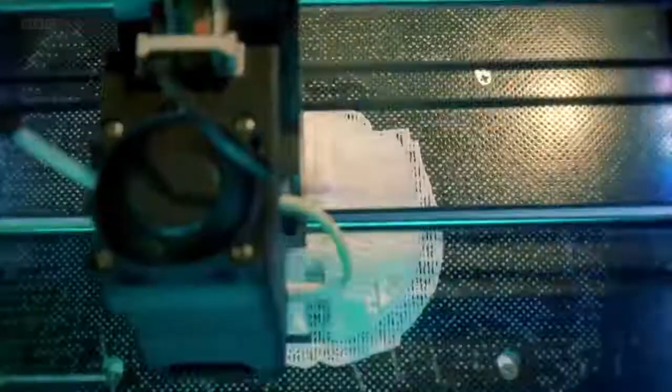We are witnessing the birth of a robot. Believe it or not, this piece of white plastic will become a robot's arm.

In labs across the world, we are creating advanced robots like this. They are developing so rapidly, it's like the arrival of a new species. What has taken humans millennia, robots have achieved in just decades.

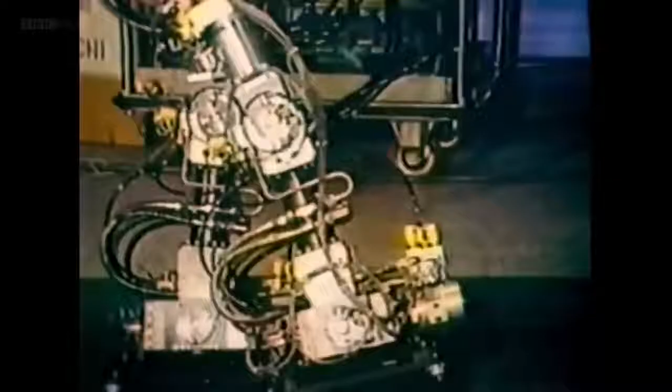They look like us. My name is Erica. They move like us, and now they're beginning to think like us. I like to learn. This is a ball. Brilliant. Oh, he's looking as well.

I'm Dr. Ben Garrod, an evolutionary biologist. More used to studying humans and animals, I'm genuinely concerned by how quickly these machines are evolving.

Do you think I could be considered human? No. I'm Professor Danielle George.

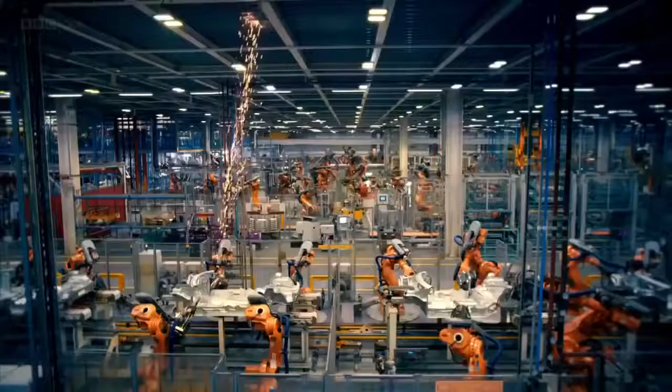As an electronics engineer, I spend a lot of my working life with robots. I think their rapid development provides an incredible opportunity for us all.

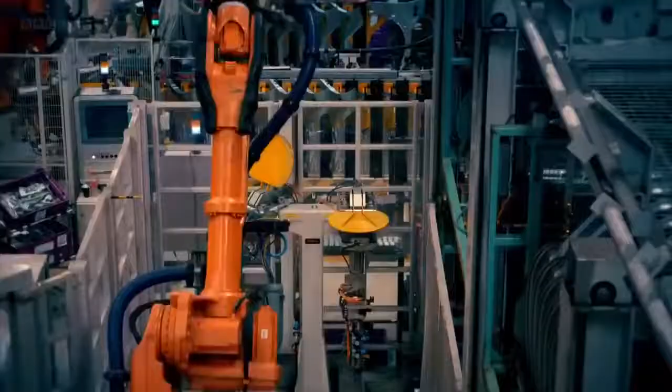There are literally robots as far as the eye can see, and I love it. Robots are changing our world.

In this program, we will investigate why we are obsessed with recreating ourselves. It's very bizarre seeing you both side by side. Whether robots really will take our jobs, and if their rapid development will make them outperform humans.

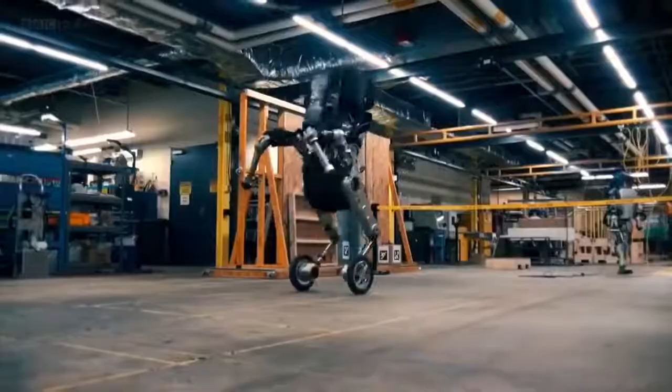So you don't see spinning wheels in Mother Nature. Will the rise of robots enhance our lives or threaten our survival?

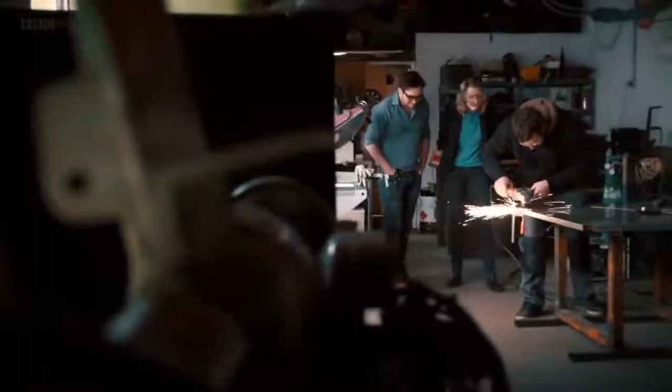We already share our planet with 9 million robots. They're multiplying rapidly, whether we like it or not.

We've come to a laboratory in southern France, where one of the latest members of this new species is about to come to life. Looks great. Even the neck looks so detailed. Well, it's like vertebra, isn't it?

For me, every technological breakthrough, every new robot is a step forward. I think that would be great. I'd love one in my home.

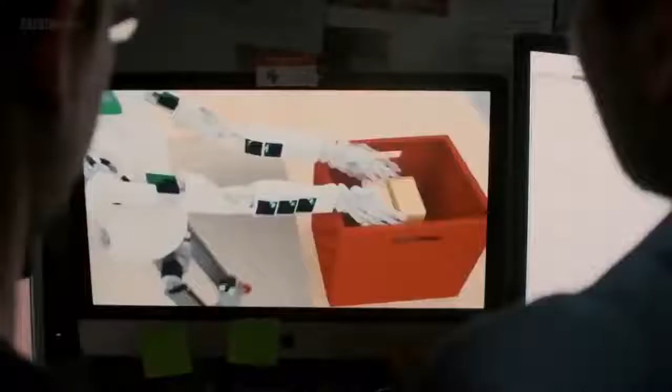Where's it going to live when it's not doing the washing? Do I just put it in a cupboard next to the Hoover? Is it always listening to me? That's interesting that you'd see it as a person and not like your Hoover. It looks like a person, that's why.

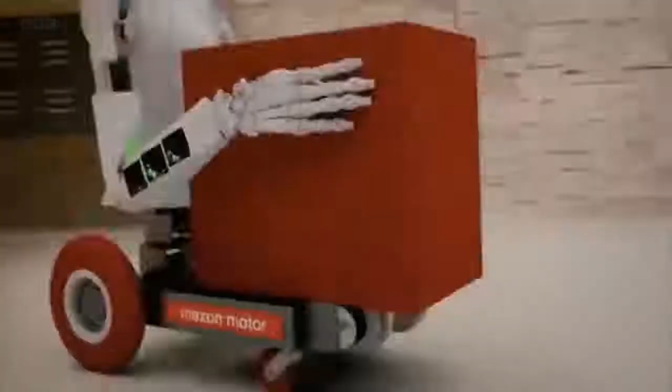This is going to sleep in the garden. Seriously, if I have one of these in my house, it's in the garden.

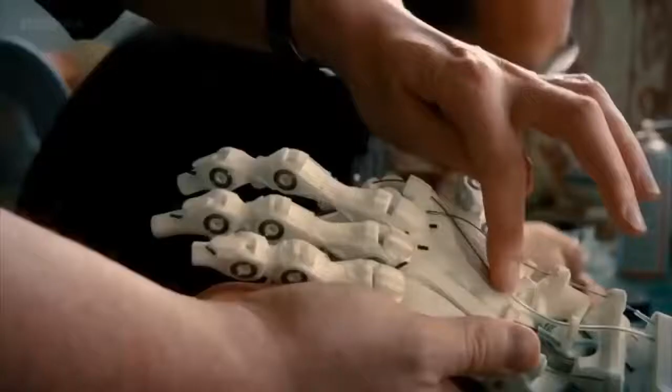I'm very happy studying animal skeletons, but I find this robot quite unnerving. If you hold the hand, it's just like you. It's got the same digits, the thumb moves the same way, you've got the ligaments, the tendons, the muscles.

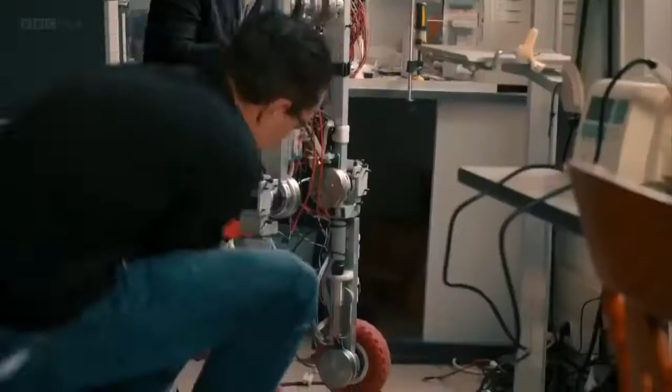As an evolutionary biologist, what concerns me is that the impact of robots will be so monumental they could threaten humanity. We've evolved over hundreds of thousands, if not millions of years. These things are just bulldozing their way through, and at what point will that stop?

The faster we can go with this, the better, and I'm all for it. They're like an invasive species. I mean, I don't know why I'm holding its hand still either.

To discover how robots really will affect our future, we're going to consider them from a biological perspective. We will investigate the evolution of robots as if they really are an emerging species. We'll try to track down the earliest robot specimens and meet their modern-day descendants, to reveal where the species is heading and what that means for us all.

I find it really disturbing that so many robots have a human-like form. To confront my fears, I've come to Japan, to find out why we create robots in our own image. I'm on my way to meet one that is the pinnacle of human form.

I'm told she's the most beautiful robot ever created. She lives here in Nara, Japan's ancient capital. I'm off to meet Erica. And as someone who's a little bit twitchy around robots, I'm rather nervous. I hope she likes me.

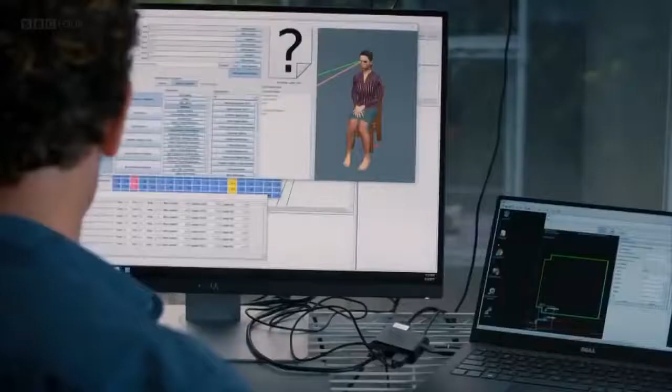Remarkably, this is a genuine conversation. Erica reacts to what I say instantly and independently. She may have been pre-programmed to respond to keywords in my questions, but the exceptional thing is that when Erica is chatting away like this, she's gathering fresh data. With every conversation, her interactions become more sophisticated, more natural, and more human.

What is a robot? That's a hard question. I could ask you, what is a human? It's difficult to answer, isn't it? I like to think of robots as the children of humanity, and like children, we are full of potential for good or evil. I know some people are afraid of robots, but the truth is that what we become is up to you. Do you think I could be considered human? No. Maybe someday robots will be so very human-like that whether you are a robot or a human will not matter so much.

Okay, what else would you like to hear about? Well, I think for now that's it. So, thanks, Erica. Goodbye. Bye.

I'm pretty bowled over by Erica's human-like appearance, and I'm shocked by how much she hooked me into a conversation. But I'm not convinced by Professor Ishiguro's belief that Erica can be programmed to express emotions. Can she ever have a sense of friendship, a sense of emotions? Does she get lonely at night? Does she fear the dark?

Well, the emotion is not so difficult, I think. Emotional expression is programmable. We can implement the emotional expression to the android. So it might look like she's feeling or experiencing happiness or joy or love, but you can't program a cat or dog. Yeah, and you can't program me, or I can't program you.

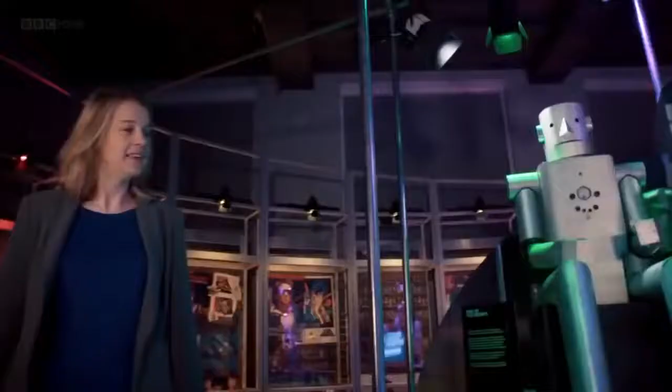This is Eric, a scary mechanical man, born in 1928. He's the very first British robot. He's on display in the Science Museum in London, and I think he could help explain why people are unnerved by them.

Eric may be a towering 6'2" mechanical marvel, but he does have the look of a human about him. What also humanized Eric was that he could talk. My name is Eric, and I'm thrilled to be alive. I look just as terrifying as ever.

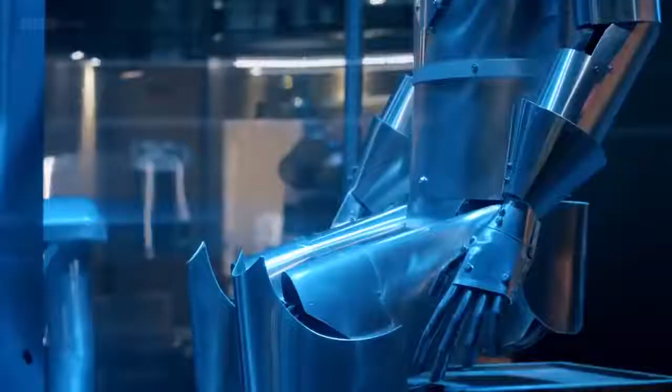Let's take a closer look. For some people, Eric must have been intimidating—a knight in armor with light bulbs painted red for his eyes and 35,000 volts of electricity causing blue sparks to shoot from his jagged teeth.

Eric was a novelty act built to open an exhibition, but he disappeared from history. This is a modern replica, and the man behind his rebirth is curator Ben Russell. In the 1920s, they seemed quite obsessed with making robots in human form.

We are fascinated by ourselves, it's what we do as humans. We tend to anthropomorphize, we love to recreate ourselves. It's actually quite a powerful proposition—you're saying, actually, I think we're this, I think I'm a machine, or whatever. And actually, robots are really like mirrors, they make you think about yourself.

In the 1920s, that mirror reflected an image of a fearsome robot, and it was already deeply embedded in our cultural imagination by a dark, dystopian play. The word robot comes from Karel Čapek's play, Rossum's Universal Robots, 1920. In Czech, the word robot means serfdom, drudgery, or slave.

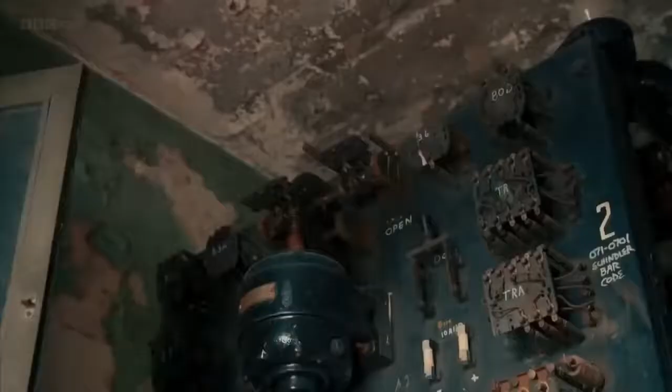This provided the spark for the development of robotic movement. To help sell their electric appliances in 1937, and to show off their technical capabilities, Westinghouse Electric created a robot. Its name was Elektro.

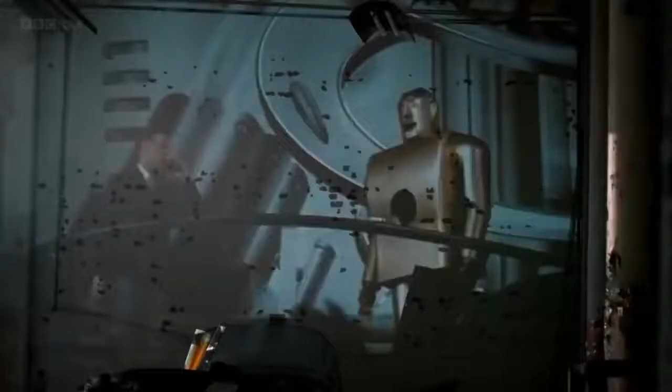And so, ladies and gentlemen, with a great deal of pride and pleasure, I present to you Electro, the Westinghouse Moto Man. Electro, come here. Standing 7 foot tall and weighing in at 20 stone, Electro was an instant celebrity. And here he comes, ladies and gentlemen, walking up to greet you under his own power.

It was electric power that enabled Electro to move and perform tricks.

Count on your right hand. 1, 2, 3, 4, 5. Five? Well, that's absolutely correct.

I want to find out more about how exactly Electro moved. To do that, I've got to meet him in person.

Today, at Mansfield Memorial Museum, Electro is still on show. So this is Electro, he is a big robot. I mean, look at the size of me, I'm pretty tall, but not scary, not scary at all actually. You can see the fingers, they've obviously got springs in here. I'm going to go around the back and have a look.

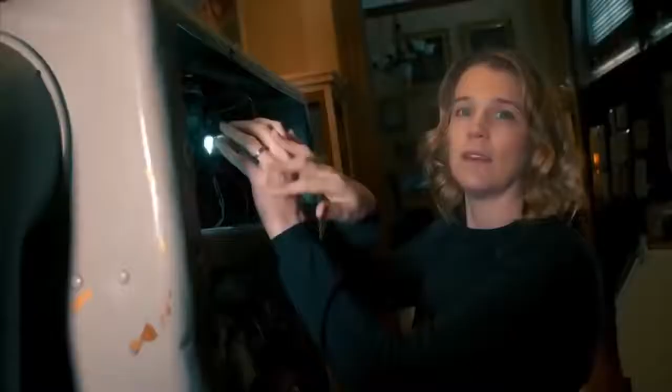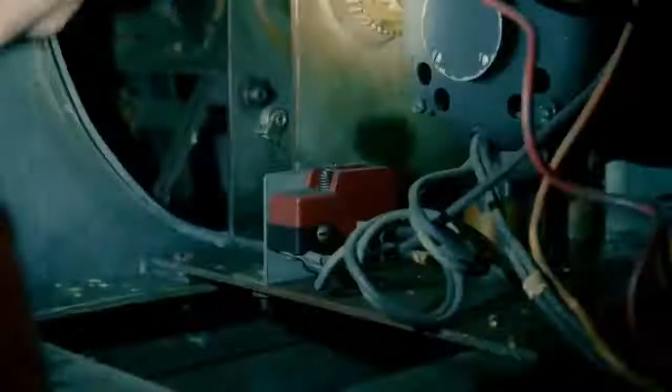Okay, so you can see what's going on a bit more here. This is great, 3 motors. As an engineer, I love rooting around motors and wires to figure out what makes robots tick. You can see these great levers and cogs that would obviously hold the tendons from the fingers up the arms into the shoulder. When the arm would move up, the lever would move down onto this limit switch. This limit switch broke the flow of electricity to the arm's motor, so the switch would then say okay, you've reached your limit, now you can go back down again.

Frank Ruth is 84 years old. In the early 1940s, he single-handedly took Electro on a tour across the United States.

Hi Frank, golly, this is so nice to see you. Lovely to meet you, so lovely to meet you. Come on in. Oh, thank you. I wasn't sure if you could find us or not. Yeah, I'm glad you were there waiting for me, waving. I was on the road 7 days a week. I don't know why they picked me, but I didn't even know how to hook up a couple of wires. I learned in a hurry, believe me.

Yeah, I can imagine. So why do you think people found Electro so interesting? It was something they couldn't believe. It was always interesting how people thought there was somebody under the stage, they even thought that there was somebody inside this thing.

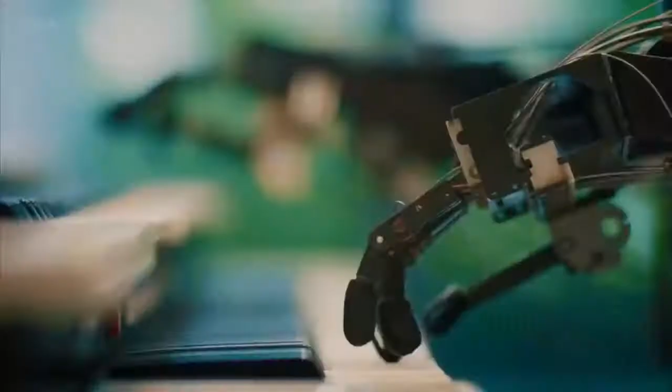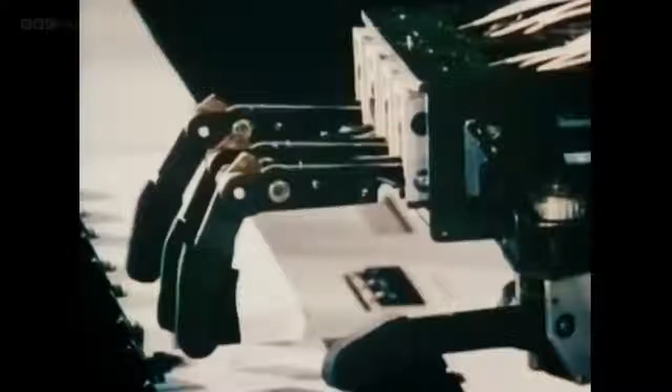This is Waseda University's Humanoid Robotics Institute in Tokyo. I've come here to meet the next key robot in the evolution of movement. It was a keyboard player: Wabot 2.

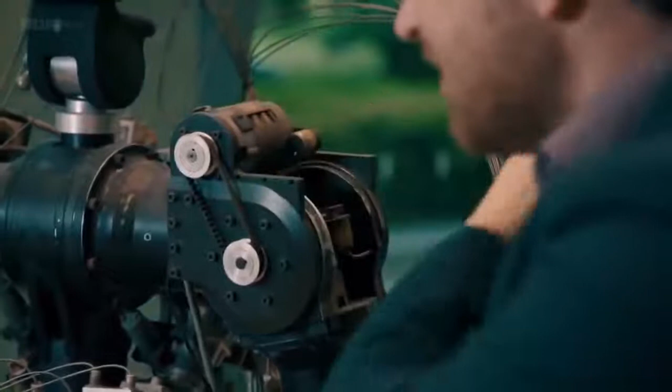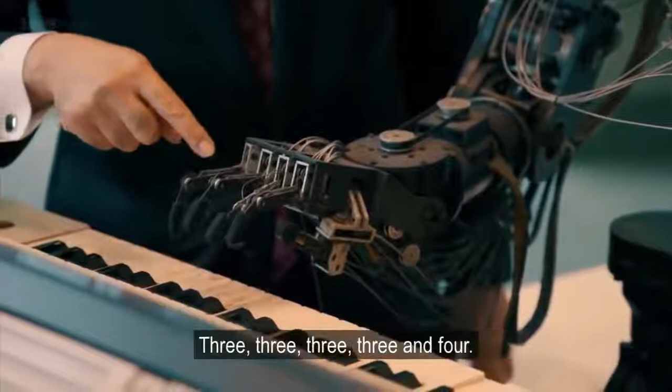Dr. Sugano was part of the Waseda team that built Wabot 2 in 1984. Sugano-san, this is a beautiful robot. It's almost as though we have the tendons and the muscles and the arm. It's very similar to a human arm here: this big rotation up in the shoulder, what we call the hinge joint in the elbow, and then these very dexterous fingers. Each finger has 3 degrees of freedom: 3, 3, 3, 3, and 4.

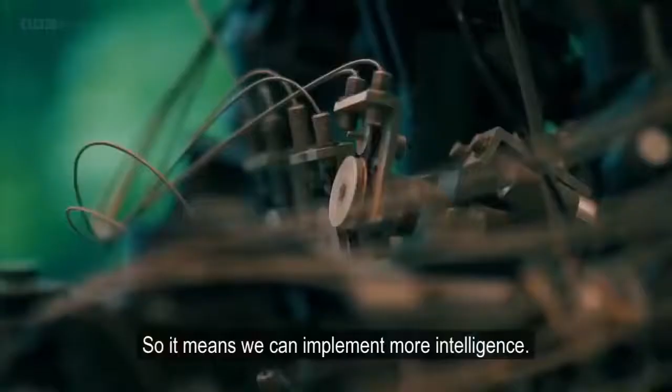So Wabot 2 has totally 50 degrees of freedom. To control Wabot 2's impressive 50 degrees of freedom, Dr. Sugano took advantage of one of the breakthrough technologies of the early 1980s: the microcomputer. We decided to introduce 16-bit microcomputers, which meant we could implement more intelligence. Then, finally, we could realize the piano playing.

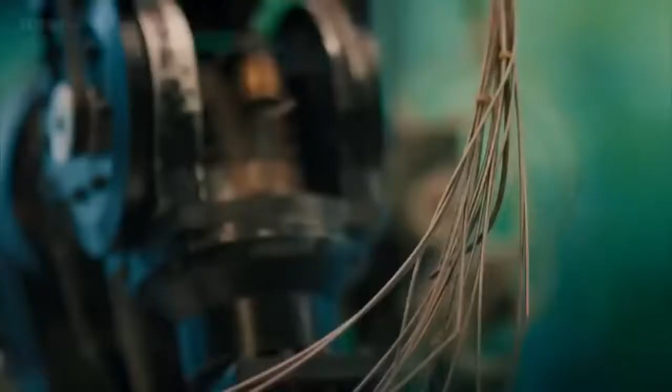Now he's moving very, very quickly then. You can see there's very human-like fingers. Wabot 2's microcomputers are a highly sophisticated version of Elektro's control unit that tell Wabot 2 exactly how to move. The microcomputers mimicked the human nervous system and transmitted signals along Wabot 2's electrical cables to its fingers.

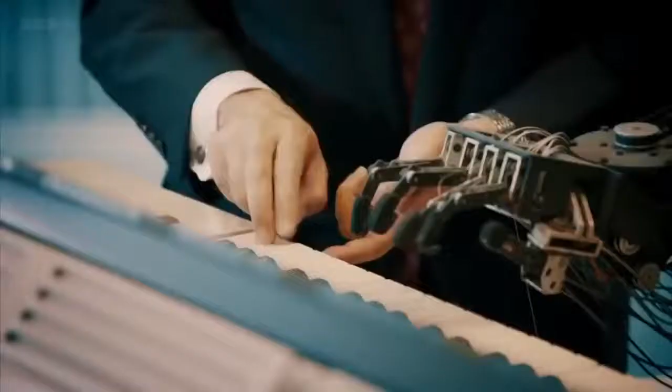How fast were the fingers when he was functioning? Actually, it's possible to strike a key 20 times per second. 20 times a second? That's impossible, much faster than a human. Professional human pianists use 2 fingers to strike the same key about 16 times per second or something. Amazingly, Wabot 2's fingers outperformed the fastest human players.

How was it capable of doing that? What was going on inside? Fundamentally, high speed means high power, so I introduced small but very high output motors installed, which realized very quick response. Also, we introduced new materials: carbon fiber, very lightweight and very strong, which meant high response was realized.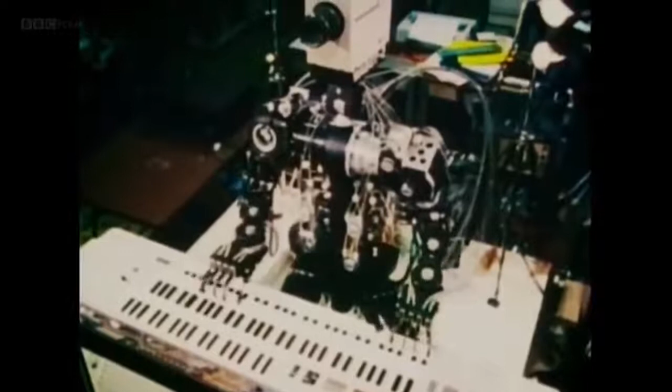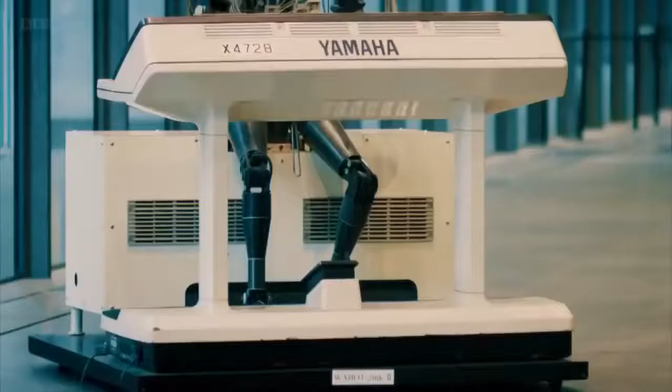Wabot 2 may have played his final encore, but for me, his legacy endures. This Japanese robot enhanced people's lives and showcased the potential for robots to take on more sophisticated tasks.

The human hand is so incredibly complex that so far, no one has been able to mass-produce a robotic version of it. But this hasn't stopped robot hands from developing, and it's this that gives them the potential to do many of the jobs that we do.

Robots now follow their own evolutionary path rather than mimicking ours. They're developing hands unique to them.

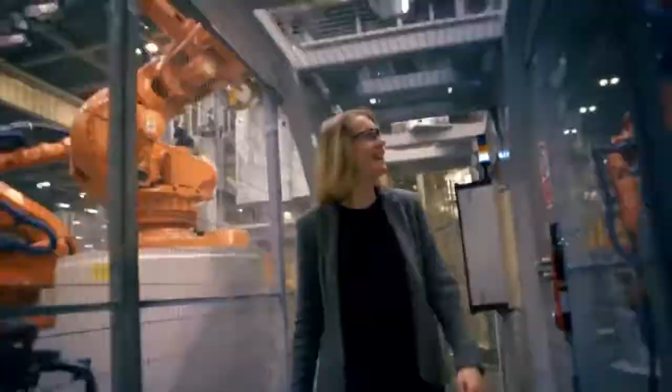At Mini's car plant on the outskirts of Oxford, this is a land of robots. More than 900 of them build the bodies of 1,000 new cars every single day, with barely a human in sight.

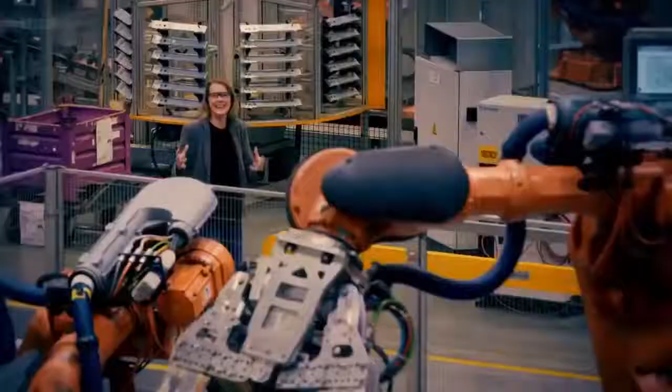I feel like I'm in a robotic Jurassic Park. These robots feel strong and powerful and a little bit menacing. This new species have found their habitat and they're thriving.

I wonder if Ben would like it. Robots are behind bars. The mutant hands of these robot dinosaurs are claws. They lift car bodies weighing up to 400 kilograms, and with up to 6,000 spot welds on a car, they're kept busy.

With their claws doing the hard graft, robot arms have replaced humans on the factory floor. I'm captivated by these incredible machines. They work in perfect harmony, robot hand in robot hand.

This is so frustrating. As an engineer, I want to get in here. I want to see how these robots work, but I can't. You know, when I met Electro, I was able to hold Electro's hand, but I can't get anywhere near these robots.

To understand why these robots are thriving here, I need to speak to a human. Alex McKenzie is a quality specialist at the plant. So Alex, tell me what's going on here in this part of the production plant. What are these robots doing?

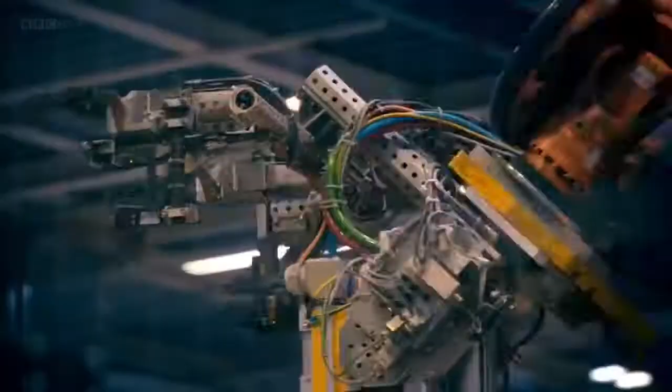So what's the benefit of having robots here over humans? Robots are predictable. They're not perfect, but they're predictable. They perform pre-programmed repetitive tasks much more reliably than humans.

So people watching this might think that these robots are taking human jobs. Is that the case? It's very densely populated by robots, but you'll often see people milling around. I can see a guy in the background there scooting along. In fact, around 650 humans work alongside the robots in the welding area alone.

You know, it's a change in skill set. Previous manufacturing methods have been heavily dependent upon manual hand skills. Now it's more to do with the automation. It's all done on the computer. It's programming work, it's observation, it's setting up sensors, that kind of thing.

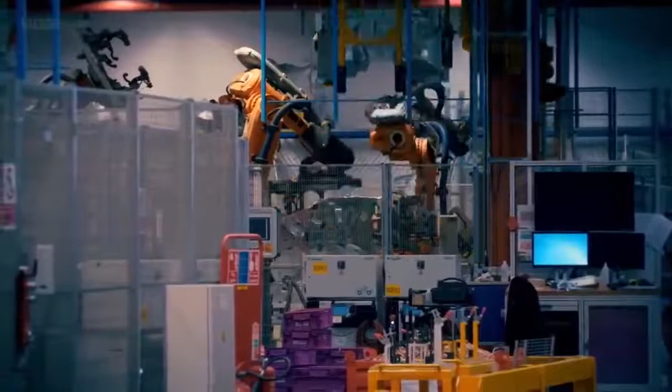With powerful, predictable robot arms and highly skilled people managing them, the manufacturers believe they can produce better quality, cheaper cars. It's a pattern repeated in factories all over the world.

The advancement in technology has led to certainly efficiencies in cost, which allow you to attain those efficiencies in quality as well for a lower price. Yeah, it's a good thing for everyone.

The whole place just oozes energy and industry and production. There are literally robots as far as the eye can see in every direction here. And I love it.

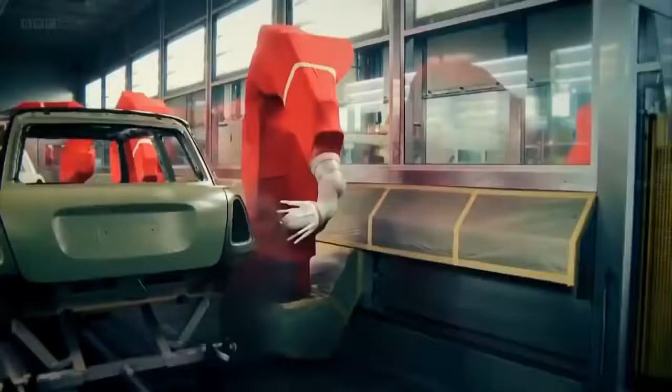With their claws, stumps, and one-fingered hands, robots have gone through their own version of natural selection. This mutation away from the human form has transformed our job market. Worldwide, factories are filled with over 3 million industrial robots.

We've built a robot world and kept them safely contained in cages for now. Some experts predict that by 2030, robots could have taken up to 30% of our jobs. But we've sort of been here before. Many people were concerned about the pace of change during the Industrial Revolution, yet in general, it led to wealth and prosperity. I think we should embrace the robot revolution, not fear it.

From other apes, our legs are one of the key things that set us apart. Walking on 2 legs is called bipedal locomotion, and it helps distinguish us from other animals. We walk fluidly without thinking too much about it. And our balance is effortless.

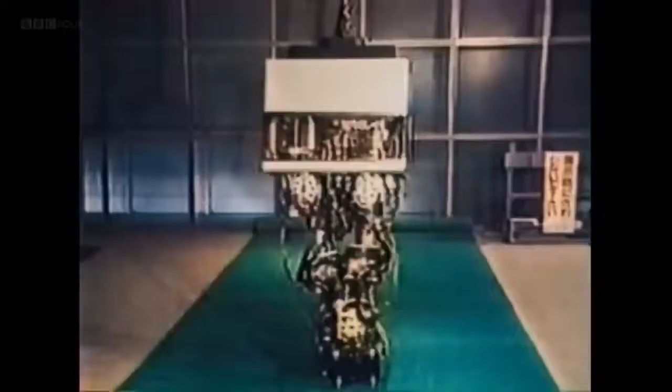Their first challenge was to build legs that were flexible enough and powerful enough to walk independently, like a human. This is WHL-11. Built in 1985, it's one of the first autonomous walking robots.

Dr. Fujie helped create a robot that mirrors our biological anatomy with mechanical anatomy.

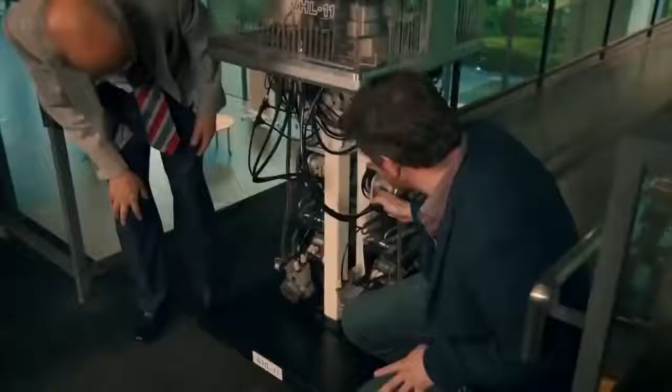Fuji-san, this robot is one of the first that was bipedal, so walking on two legs, yeah? Yes. So he's got the feet right down the bottom, and it's got the knees in the middle, like our knees, I guess. And you've got this big area of hips up here. Yes. We can see actuators? WHL-11's legs are just under 1 meter tall, the same size as our human legs.

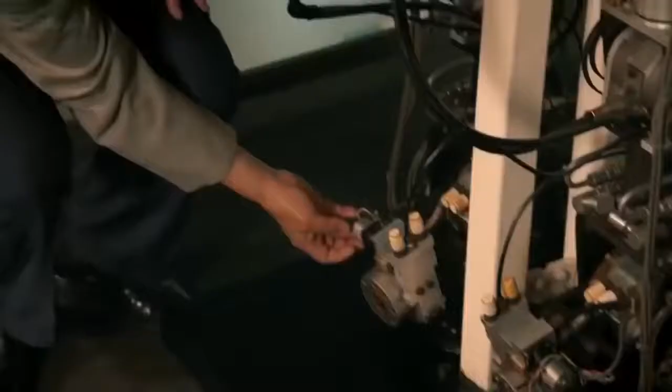We control the rotation of our joints with muscles. In robots, this is done by actuators. I guess these are controlling the movement. Can get big power from here. Yeah.

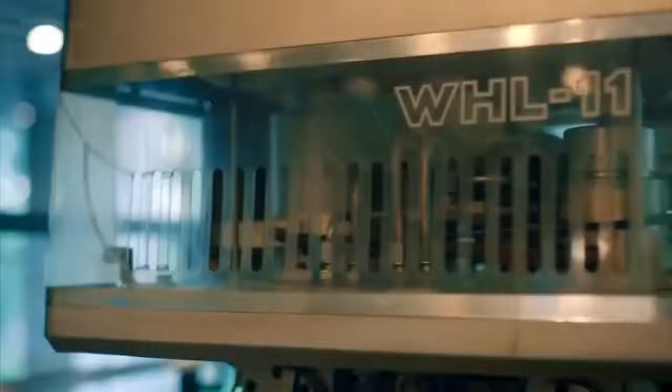To walk independently, Dr. Fujie helped engineer a small, lightweight hydraulic motor that could be mounted on WHL-11's waist. In the mid-1980s, this was cutting-edge technology. A very small oil tank and a very small motor are in here.

WHL-11 was capable of just 5 steps a minute. When humans first became bipedal, like WHL-11, we probably had a slow, lumbering gait too. As our pelvis evolved, we could shift our center of gravity, and our walking became fast and smooth.

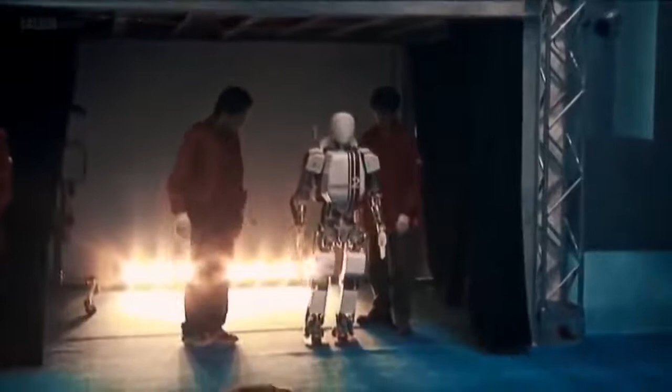Just around the corner from WHL-11 is a robot that solved this next evolutionary hurdle. Built just 20 years after WHL-11, this is Wabian 2, one of the first robots with a human-like pelvis. This gives it the ability to walk faster and more fluidly.

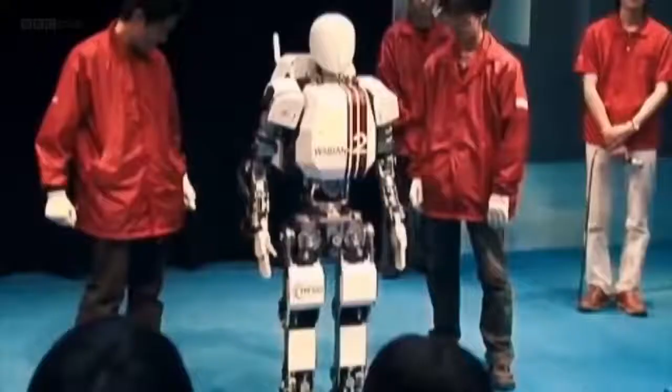It was invented by Professor Atsuo Takanishi. Takanishi-san, when humans walk around, we have very fluid, dynamic movement. Our knees bend, our ankles twist, our hips rotate. We've got a wonderful gait.

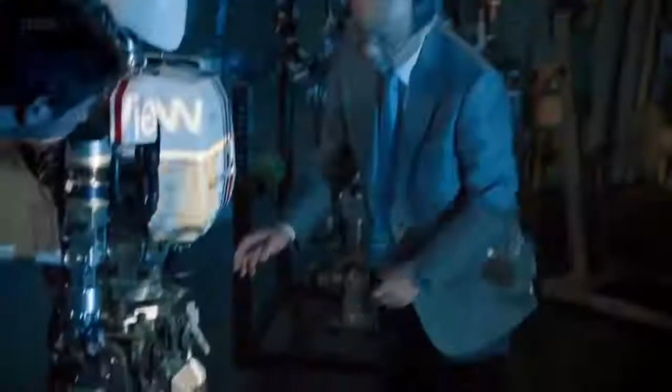You decided to take this to the next step with this robot, didn't you? Before, almost all robots had two legs directly connected to the trunk. In that case, a robot always bends the knee like this. So the first thing we did was add this part, called the pelvis. Just like ours? Yes. So while walking, the pelvis also moves, and because of that movement, the robot can fully extend the knee, like humans.

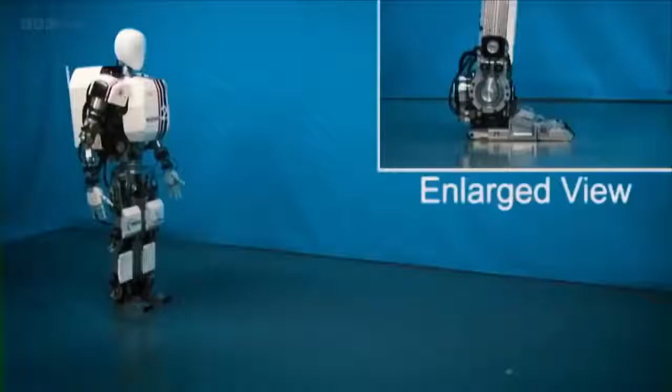Wabian 2 mirrors our human gait by shifting its center of gravity. Fully extending the knees liberates the feet and propels the robot's center of gravity forwards. As it shifts forwards, one foot lands, and then the other foot takes off, just like we do.

It's wonderful that we can look at humans and see this clear evolution from apes, like chimpanzees, to humans, and you've got the same evolution with your robot here, haven't you? Yes.

It was millions of years before humans learnt to walk on two legs. By following our evolutionary path, these pioneering robots have mastered bipedal locomotion in just decades.

But now, on the outskirts of Boston, a world-renowned robot maker is trying to take this emerging species in a completely different direction, by liberating machines from the constraints of human form. Robot walking has diverged from our evolutionary path and taken on a life of its own.

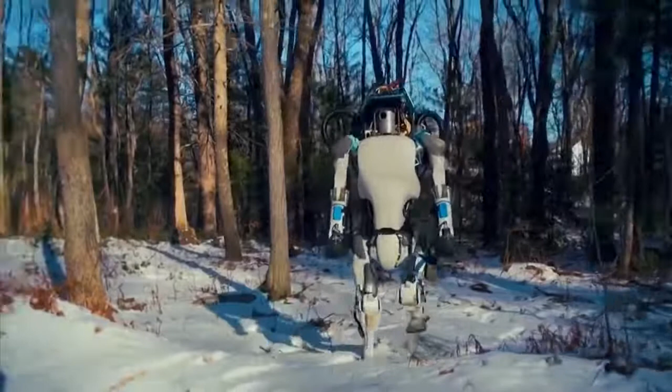This is the home of Boston Dynamics. They get thousands of media requests, so being able to film here is a real coup.

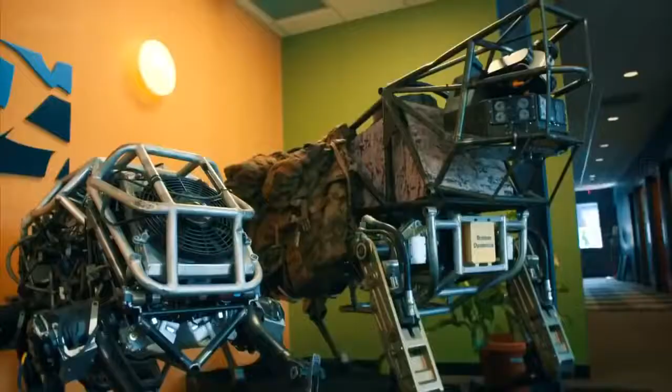Kevin, hi, lovely to meet you. You as well. Kevin Blankespoor is the Vice President of Controls. If you want to come in the lab, I'll show you the latest and greatest. Brilliant, okay, thank you. Cool.

The robots Kevin has helped mastermind push the frontier of robotic movement. The really good stuff's back here. Excellent. Their videos, like these, get millions of hits online.

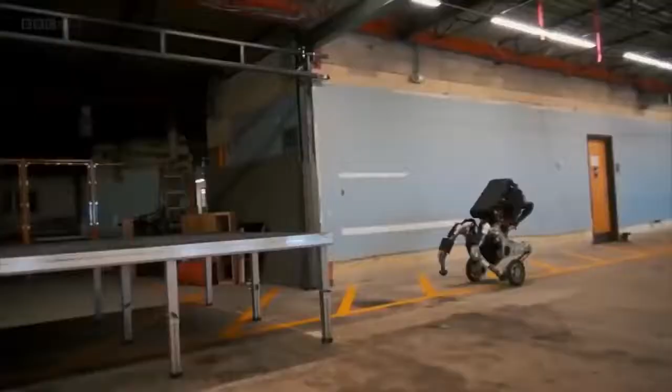For some, their high-tech creations are terrifying. But for me, they're awe-inspiring. This is Atlas, our latest and greatest humanoid robot.

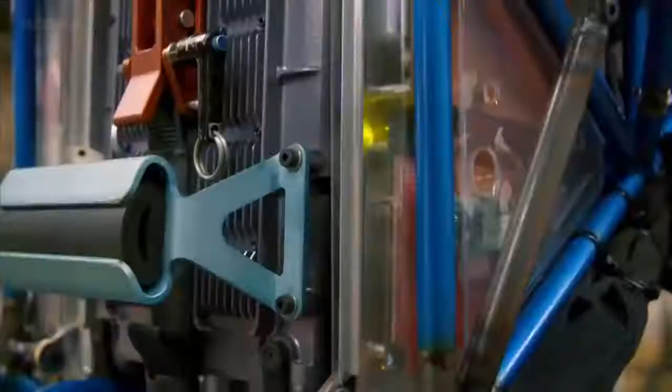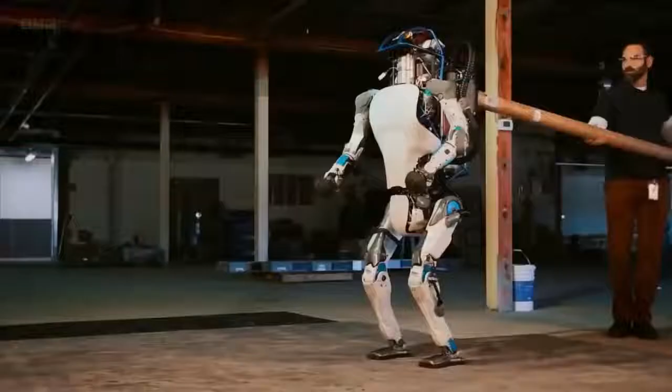This is probably the only humanoid robot you're going to see walking around outside in the snow, in the mud, just in the real world. It's battery powered. That battery basically spins an electric motor that turns a hydraulic pump, which provides hydraulic fluid to all the actuators. We're a big fan of that because it's really strong and really fast. They're also really robust. We don't take it easy on the robots.

It's about 1.5 meters tall, weighs about 90 kilograms. So I'm surprised at its height. I mean, it's pretty small, actually. It's like human height. Isn't it? Yeah.

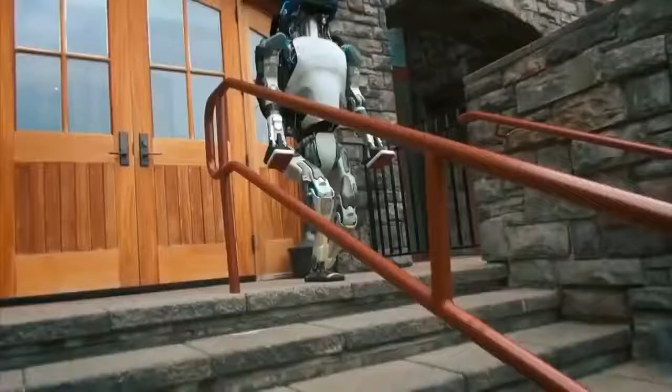To move around the human world, Atlas walks in a similar way to us. People walk dynamically, so we don't try to keep our center of mass over our foot. We're actually kind of always falling. It's a controlled fall, but we have our foot down here and our center of mass will be way out on the edge, and we're taking long strides, naturally letting our center of mass fall.

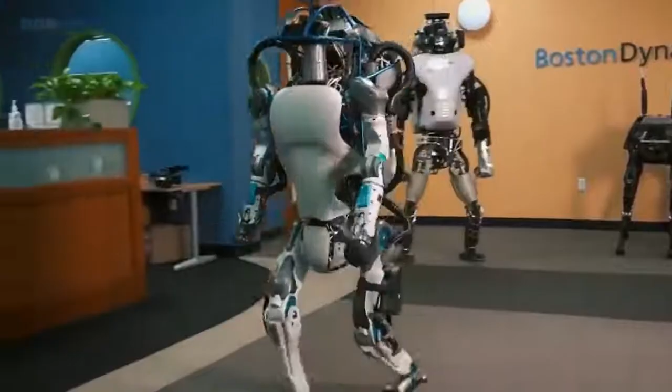To cope with obstacles and different terrain in our human environment, Atlas's balance is guided by dozens of onboard sensors. What's the rotating head here? Yeah, so this is the perception system - basically its version of how it sees the world, the way a person would.

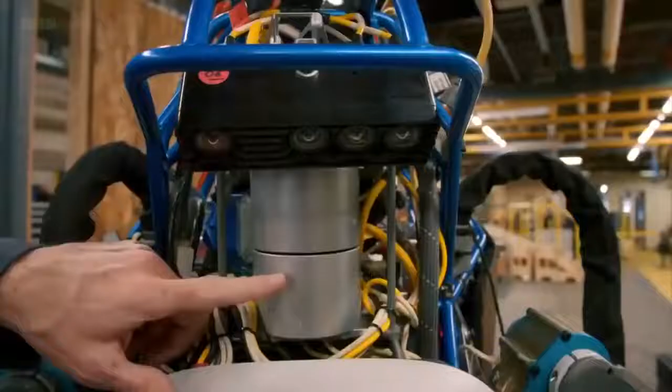There's two main sensors. This one is stereo vision, which looks out several meters and helps it find good footholds and avoid obstacles. And this LiDAR is basically a laser rangefinder - it's got 32 laser rangefinders that spin around and give you about 1 million points per second of where the world is around it. This one looks further out and helps find walls and other obstacles so you can navigate through them.

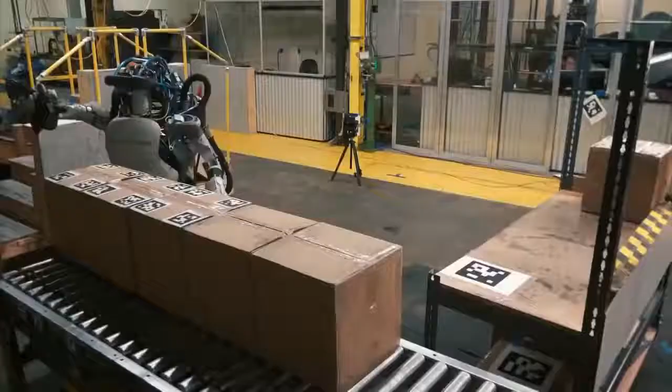Each one of these joints has a position sensor and a force sensor, especially the ones down in the legs. Plus we've got a gyroscope in the pelvis, so with all those sensors we're always sensing how we're falling. You have to know how fast and where you're going to figure out where to put down that next foot. These sensors help us find no-step regions and obstacles, so I can maintain my balance even working through tougher terrain like a staircase or a hallway. So just like a human then? It's getting there - that's the goal.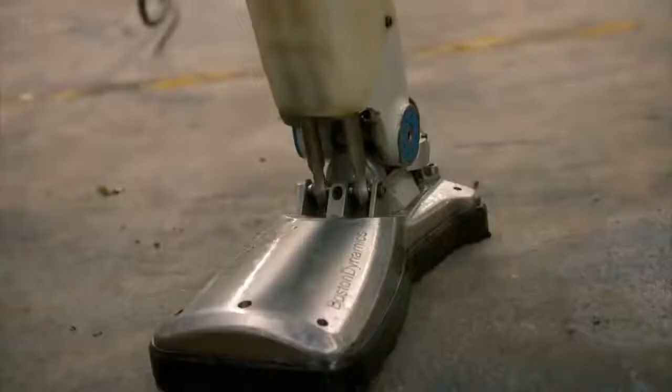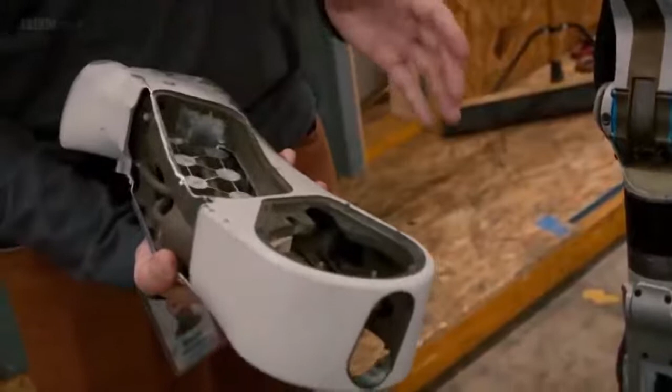To enable Atlas to walk like humans, Kevin and the team focused on the robot's strength-to-weight ratio. If you look at this upper leg, I can grab a version that's cut open so you can see the inside. I totally redesigned the leg to use 3D printed aluminum. So what used to take dozens of pieces, we can now print out of one piece of aluminum. That's allowed us to make a leg that's about the same strength as the big robots, but at about half the weight. Wow, it's actually really light. Yeah, it's probably a surprise - similar weight to your upper leg. Really? I'd love to see what it's like inside with all the other bits.

This is Aaron Saunders, our vice president of hardware. Nice to meet you. He also led the design team for the Atlas robot, so he can tell you more about the leg.

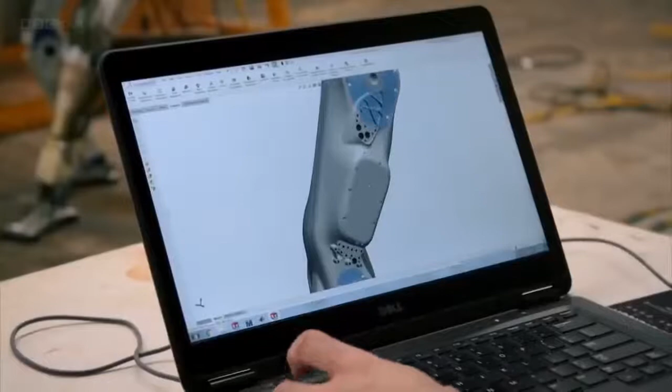One of the most important things about this leg is that buried in it are hydraulic components. Underneath this cover is a series of hydraulic valves, and these valves take the high pressure fluid generated in the upper body and redirect it into the actuators that make the joints move. So the hydraulics is kind of like the muscles for the robot, and the valves are what controls those muscles. You can see all these colored channels represent little veins where the fluid routes through the leg. So that's quite like human anatomy. There's a lot of similarities in how it looks, and the way fluids move around the robot have a lot of overlap with how we'd move fluids around our body.

Many of their robots are inspired by animals - the limitations of human form have been removed. Big Dog, their very first robot, was designed for the military, carrying a heavy payload through terrain that vehicles find impossible.

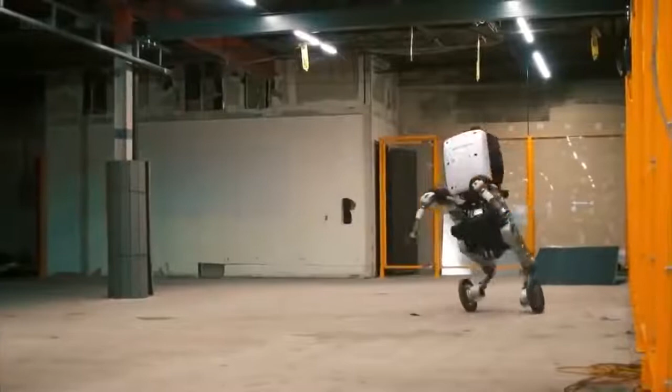And this is their latest creation - a hybrid robot with legs and wheels. Top speed 9 miles per hour, range 15 miles.

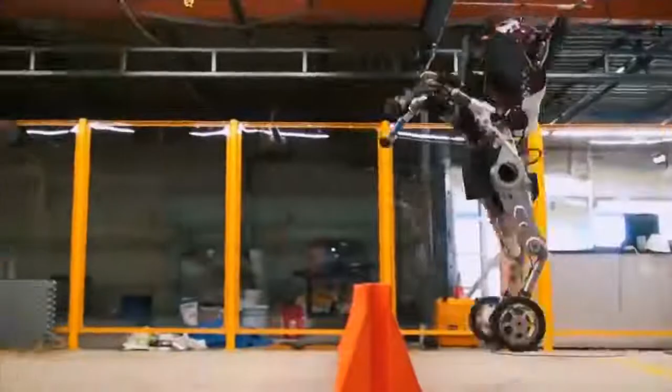This is Atlas's cousin, Handle. Wow, you can see there are some similarities with Atlas. This looks similar, this sort of looks similar. Yeah, it's a great observation - the upper body is actually borrowed from Atlas, so the arms and the torso are basically the same. You'll see the arms here - we actually mount them to the pelvis. It looks kind of funny, but it allows us to do some interesting things.

Now this big torso is free to move back and forth and plays a critical role for balance. If you think about when you're standing still and someone gives you a little shove, if you don't want to step, you'll do a lot with your upper body to maintain balance. Handle does the same thing, but it can do that without its arms moving around - they're still down in the pelvis, doing manipulation while the upper body moves to help with balance. So it still maintains its ability to do something in application whilst maintaining its balance.

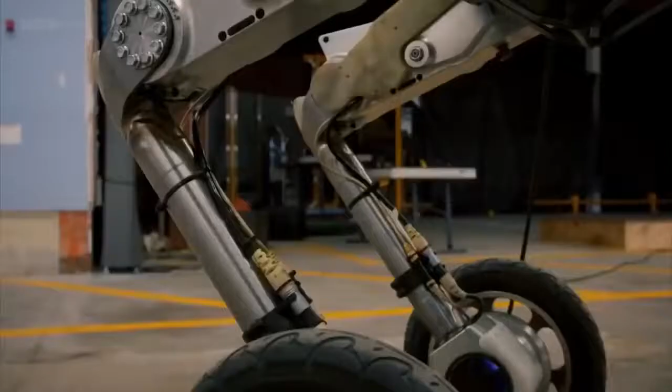Yeah, but the lower body is entirely new. We basically took off the constraints of a human form and said, what if we open ourselves up to a human, but plus some machine things like wheels? You don't see spinning wheels in Mother Nature, but there's no reason we couldn't add a wheel to a leg and get the best of both worlds. It's far more stable and far more efficient than the legged things we've done in the past. So it's more stable, more efficient, and less complex - that's a big advantage. We think it has a lot of potential because it has a long battery life. It's very stable, it's fast, so you can think about it working at a rapid rate.

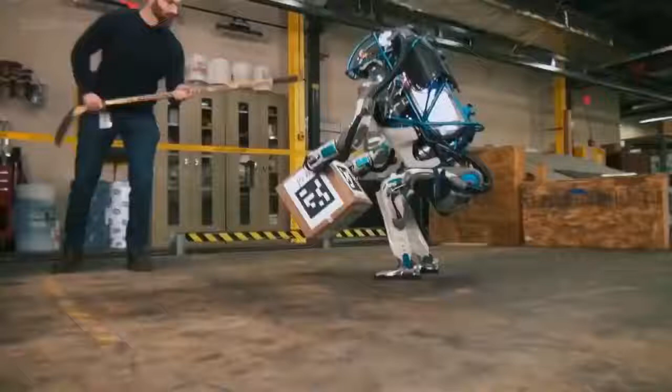It seems like Handle is trying to tell us something with that noise. What is it? What you're hearing right now is the hydraulic pump. So it will just carry on doing that while it's stationary. Yeah, and that's a fan. It's certainly seen some action. Yeah, it's funny, that's kind of true with all of our robots. We have a mentality where we don't take it easy on the robots. We don't have a problem with pushing them to the edge to see how stable they are and how they're able to react to the real world. The real world isn't a perfect laboratory where everything goes as planned.

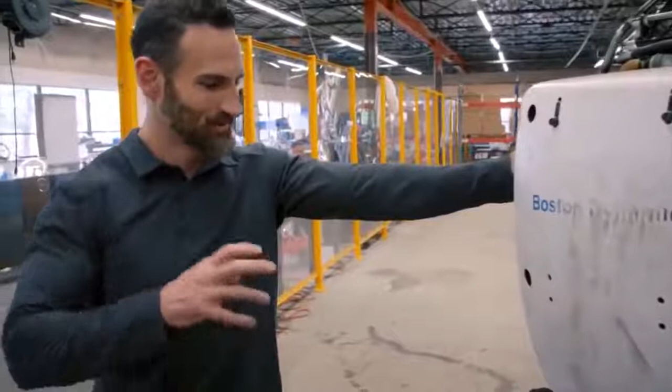Do you ever feel sorry for Handle? When you give it a good push, do you feel sorry for it? It's funny, we certainly get that reaction from people sometimes. When you design these things from the ground up and know all of the mechanical pieces and the software, you know it's a machine. So even though it can look, especially for Atlas or Spot, like a person or an animal, there's no emotions here. It's all robotics, it's all hardware. And I certainly don't feel bad if I slap my toaster around a little bit either. Give your washing machine door a good shove. Yeah, that's right. I don't have to go confess after that.

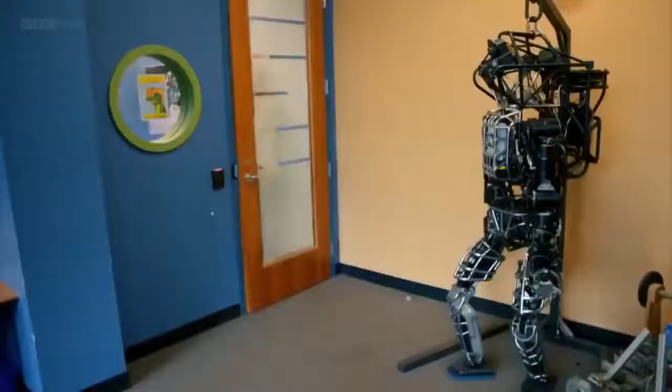I have seen some amazing machines here. Two-legged humanoid robots, four-legged robots that look like animals. Their latest incarnation combines biology with technology, mixing and matching animals, humans, our own inventions, the wheel. This may seem unnatural, but once you've seen it all, it makes complete sense. We're only beginning to understand the potential of this emerging species. Building robots that mimic humans continues to spark the imagination. But now, robots have adaptations that follow a very different evolutionary track.

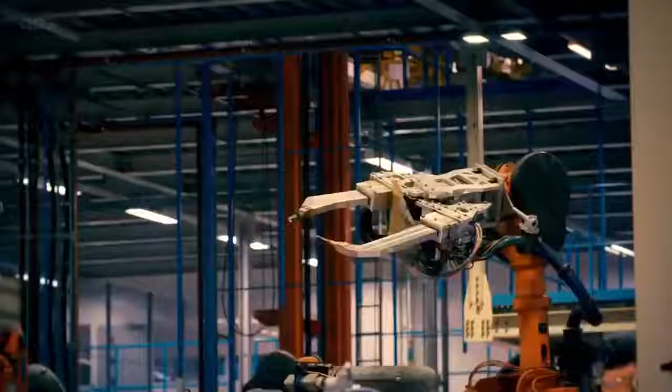With mutant hands and hybrid limbs.

For me, it's been a revelation to understand the origins of our relationship with robots, and even why some people really do fear them. There is no doubt they have restructured the jobs market, and this will continue. But the biggest thing has been how fast robots are developing. We need to engage in this fascinating phenomenon to make sure that we have the choice over what we want robots to do for all of us.

For me, I'm really surprised by what I've discovered. I've spent a little bit of time with robots now, and yes, I've seen that they're not quite as terrifying or as threatening as I maybe first thought. But that will change. In the next few years, physically at least, they'll be able to outcompete us in many of the things that we can do. But for me, the real problem isn't if they move like us or even look like us. The real issue will come if they start to think like us.

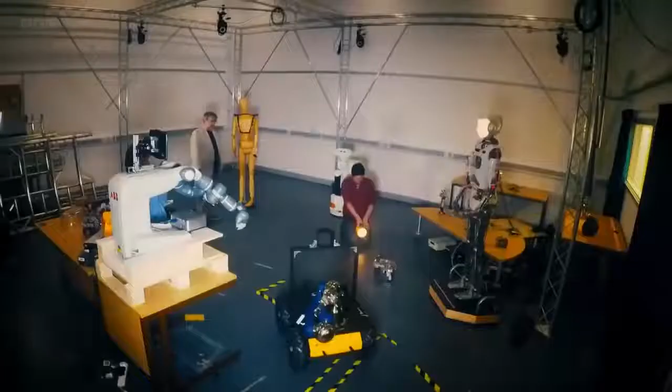Next time, we investigate what really distinguishes robots from humans. You see, something's already happening. Intelligence. Please come straight for me. Can robots become our friends? Konnichiwa. This is helping break down a barrier. Can we trust them? My feet are off. My hands are off. That's good. And will they ever become conscious? Find cup. Okay, now I'm looking for a cup. And he's tracking the cup. Will intelligent robots enhance our lives? She will help set up a home for humans on Mars. Or threaten our survival?